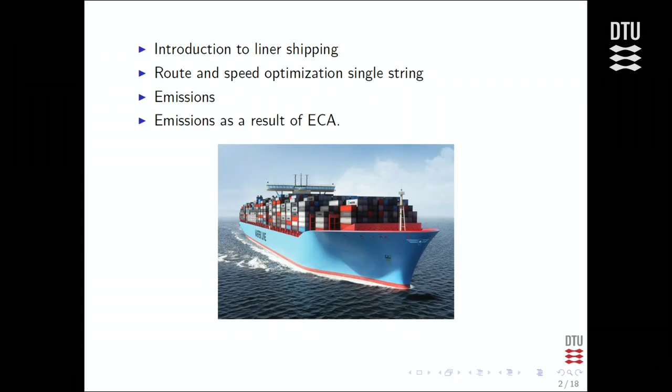So what the discussion is: does minimizing the cost of the company actually also minimize the emissions? And we're going to look a little bit at that.

In this work, we're not going to look at transshipments and all these kinds of things. We're only going to look at a single service, and then the transit time is kind of a way of dealing with the transshipment requirement that you can reach your connection on time.

Of course the companies want to reduce costs, especially now. I think before they were a little bit more like they wanted to increase number of customers, but now they want to reduce their costs because the freight rates are really low, and they want to be competitive with these freight rates.

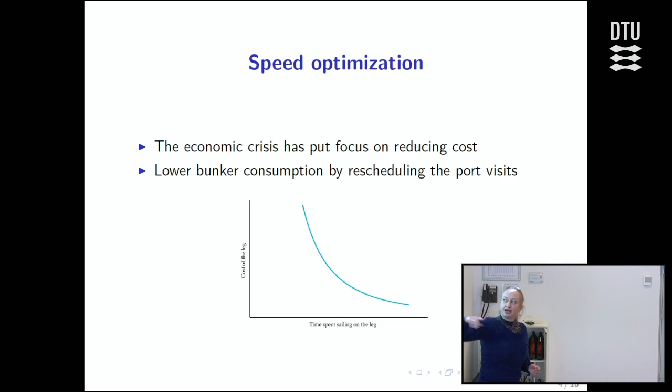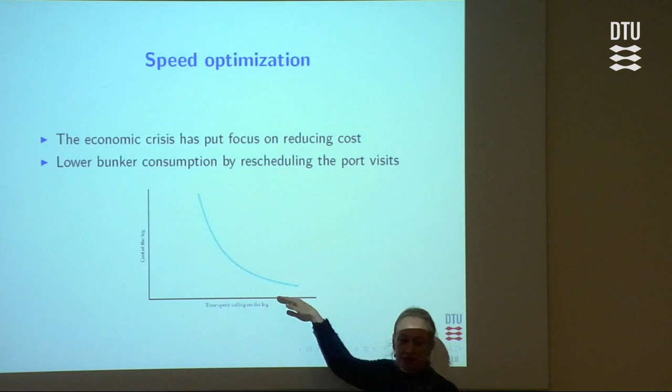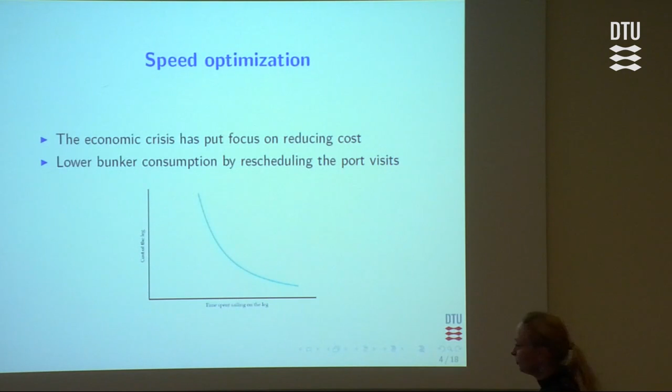And so you have this type of bunker consumption. Usually this is a cubic curve, and this is what is theoretically assumed, that the bunker consumption is a cubic curve, but it is some sort of a curve - if it's cubic or non-cubic, it all depends. But the key is that the slower you sail, the less bunker you use on the entire journey.

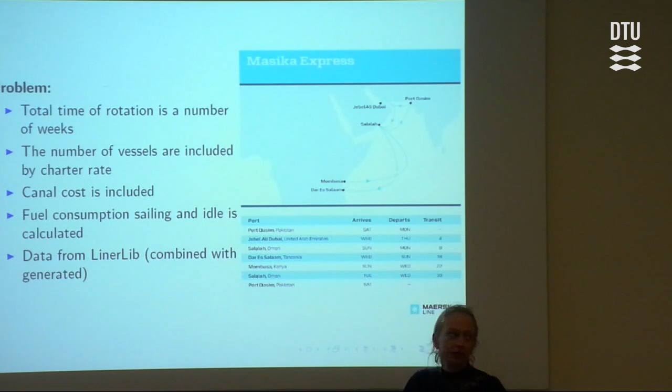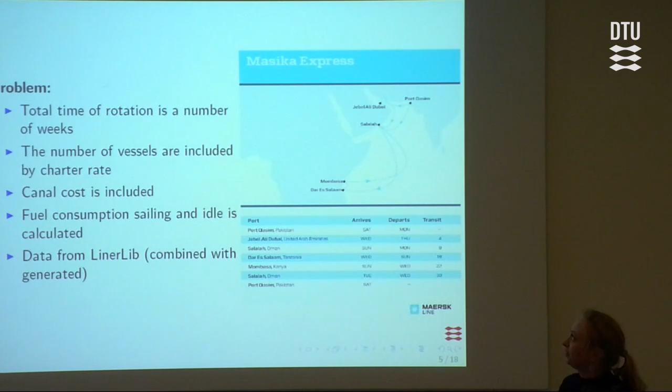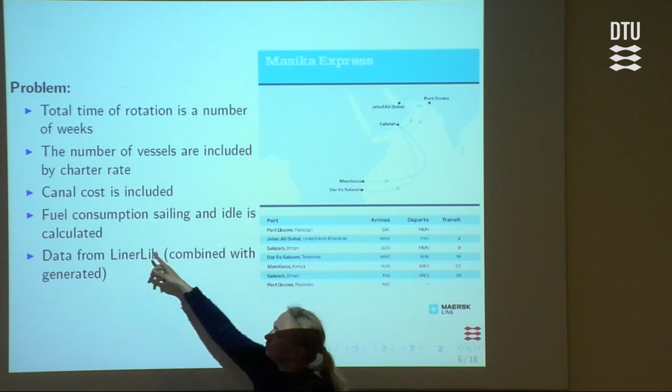So what we are considering for a problem: we have the total time of a rotation as a number of weeks, and that number of weeks has to be satisfied - for our route it has to equal some number of weeks. You can add and subtract vessels at some charter rate. Actually in the example I'm going to look at later, we don't really consider canals because it's outside of that area, but for other examples the canal costs are included.

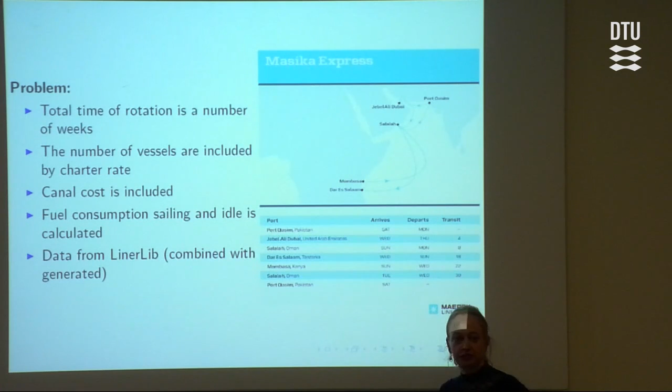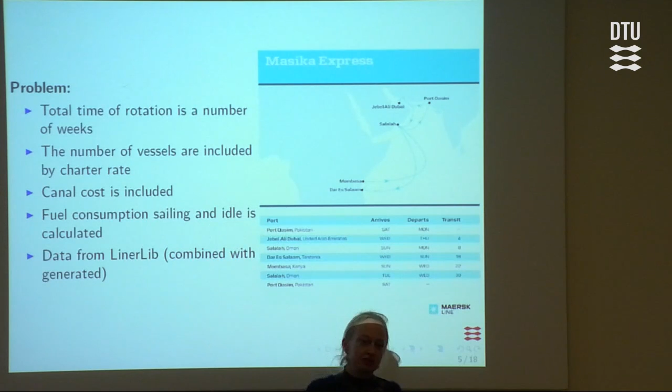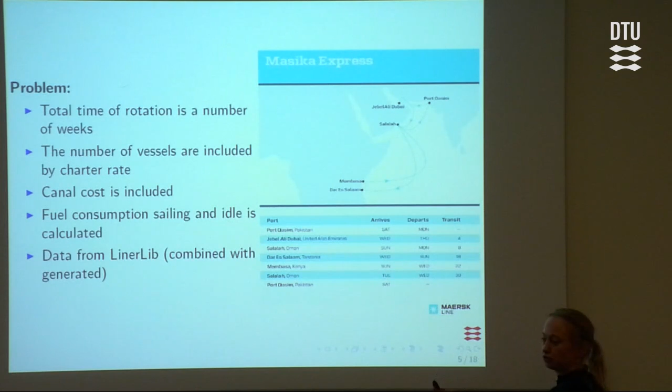The instance is part of the LinerLib, taken from the LinerLib which David described earlier. Then we have fuel consumption, and because we can't sail infinitely slow, we also have some idle consumption, because you cannot reduce the consumption infinitely - there is some limit to where you actually increase the consumption because you extend the time that you use on the journey.

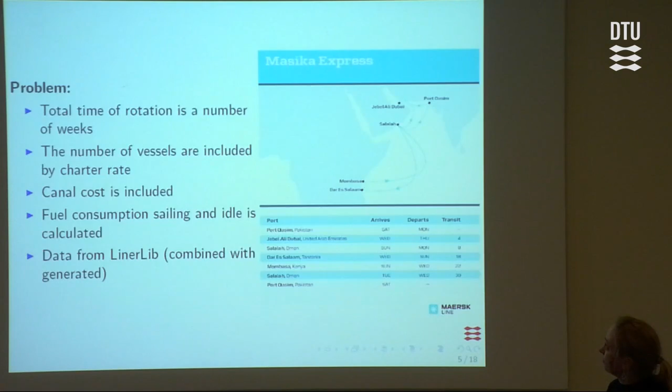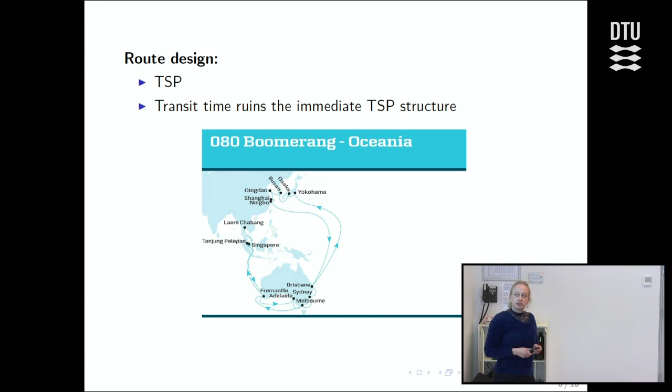This is just an example of a route where you have these port visits. So we kind of use a TSP structure, but the transit time ruins this idea of using a TSP to start with. You can't say that the shortest route is also the cheapest route, because the shortest distance doesn't necessarily introduce the cheapest amount of bunker, due to this transit time constraint.

Okay, then we go into the emissions. So we have the sulfur oxide emissions, and that causes acid rain and respiratory diseases. There are some regions - the Baltic Sea region, the North Sea which is kind of a connected region, and the North America coastline, US and Caribbean.

Then in 2020, it's actually supposed to be also for the rest of the world. There's some bunker reductions - oh no, I think the US Caribbean is supposed to be... now I don't remember, but the sulfur is supposed to be reduced in 2020 or maybe later to 0.5% sulfur.

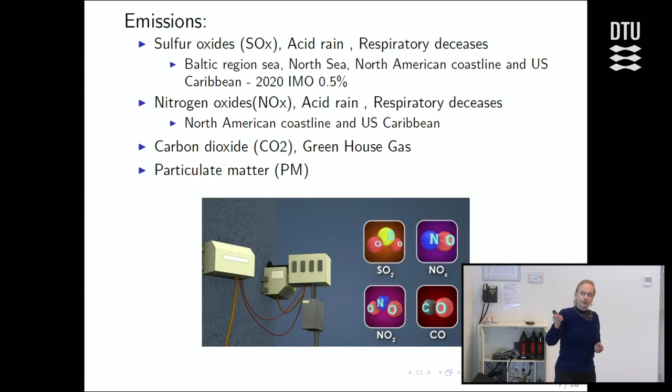And then we have the nitrogen oxide, which basically causes the same health issues, and that's in North America and the US Caribbean. And the carbon dioxide, which is a greenhouse gas and affects the climate, and then particulate matter. So today, what we are going to look at in this example is the sulfur and the carbon dioxide emissions, and we are ignoring the nitrogen oxide and the particulate matter because we are looking basically at Europe.

So the question I wanted to pose is, by these emission control areas, do we really get what we want or what we need? And how do companies change their operations according to these emission control areas?

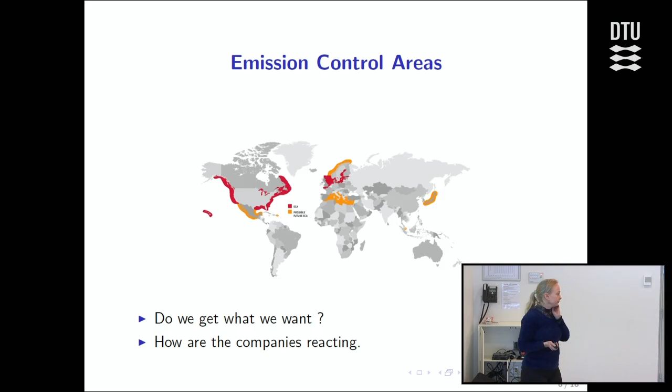We can assume that companies want to reduce their costs. They don't want to use extra money on something that is not required, but they also want to satisfy the requirement. They don't want to have the media come up and say they're getting a fine, at least not the big companies that also care about their image. They want to satisfy the requirements.

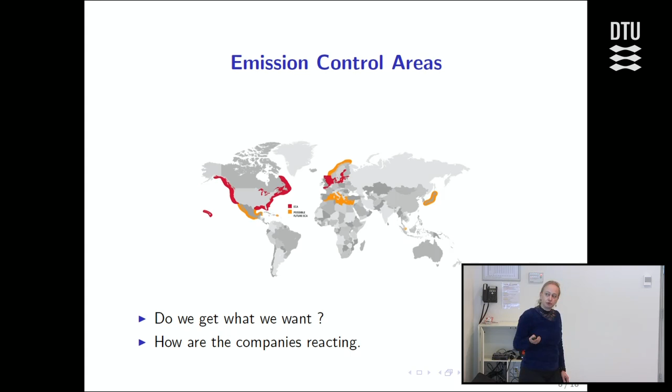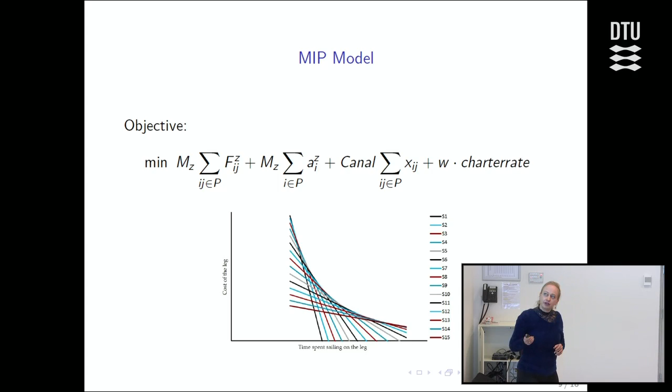So do these requirements that we have here with the ECA zones actually do as we want? We've made this model that has all these requirements, and we have the bunker consumption, where Z is the zone, so it could be a non-ECA zone, an ECA zone, or SECA zone. This is for sailing, this is for idle time, and then there's some canal cost and some charter rate. This is basically our objective from the company - they want to minimize these costs.

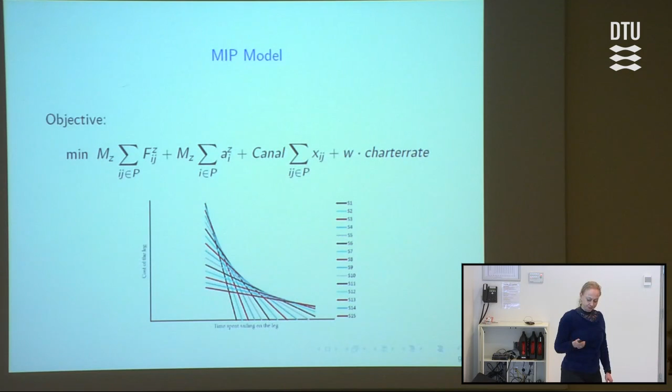And so for the bunker consumption, since it's a non-linear function, and we want to make it a linear program, we have approximated it by a large number of secants.

What we have looked at is the bunker type 380, which has 3.5% sulfur. This is the amount of CO2, and this is the amount of sulfur. And this is the price of the bunker. And this is the bunker that is required in the ECA zone at 0.1% sulfur, with its CO2 amount - slightly higher CO2 - and the sulfur amount, which is low. And this is the price of that bunker.

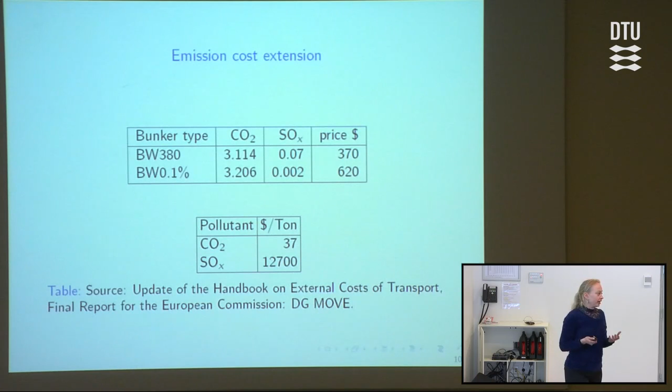We've also gotten some numbers from this handbook, because to me these numbers are a little bit hocus pocus, but luckily some other people are capable of calculating them - this is the environmental expenses, the expense on our health and our environment. It's assumed to be $37 per ton of CO2 and $12,700 per ton of sulfur. This is what they have calculated in this report.

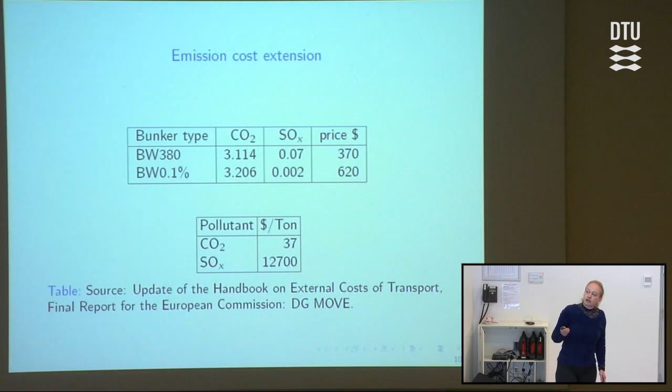So we have a second objective. Instead of just taking the cost we have here, we add an additional cost - the cost of the bunker you purchase, plus the external cost that the emission introduces. So we've split the term into two: one for the bunker and one for the emission cost. And then we again have these other costs for the company.

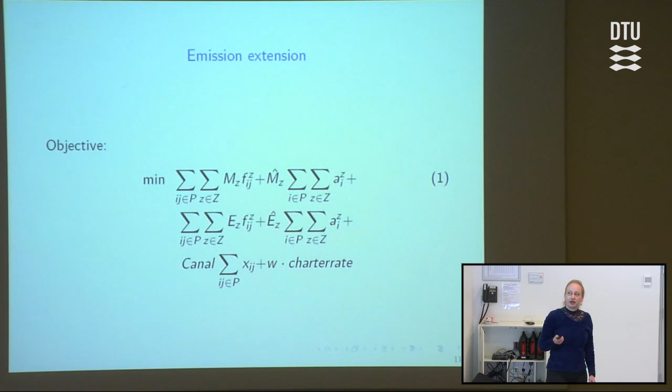So we assume - we have these different test instances, and later on we will focus on this one, the I3, which has the transit time. But we have this difference with different transit times and different fixed berth times, and we have calculated.

And so the question is - there's also people living in Casablanca and Agadir, who can just as easily get a respiratory disease as we can. So the question is, what is the overall pollution on a journey like this? I think this has been one of Maersk's routes, taken from their page.

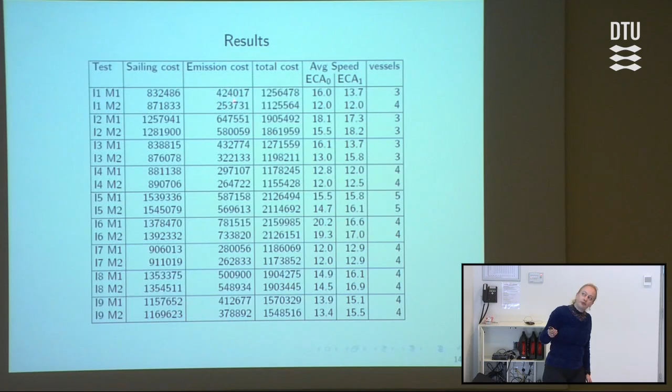So the emission cost is higher because they're just operating from the perspective of lowering their own cost. You can see the total cost to the environment, the sailing cost for the company, and then the emission cost, which is much lower here, and the total cost. There's a big difference in the emission cost between the two models, but the difference in the sailing cost is actually not as big - so there's not so much extra the companies have to pay to actually save a lot of money on these external costs.

For the environment. Yes.

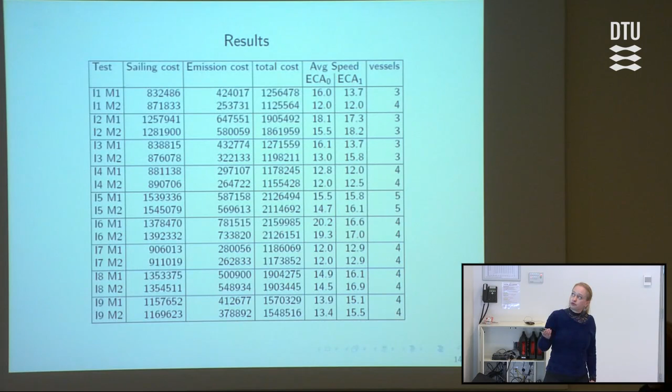And we'll take this one out, which has 2 transit times. So it has these requirements for the transit times that it has to reach. And we'll look at that one in detail on the emissions.

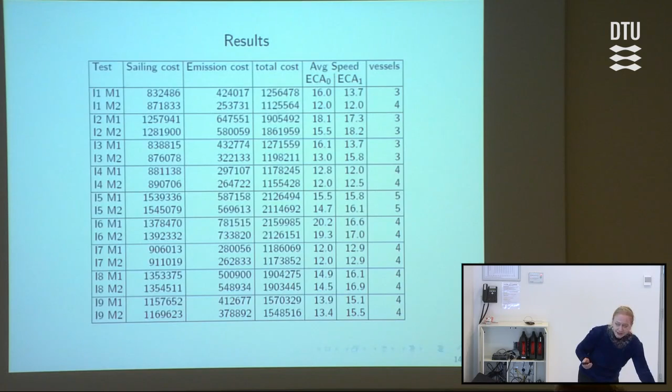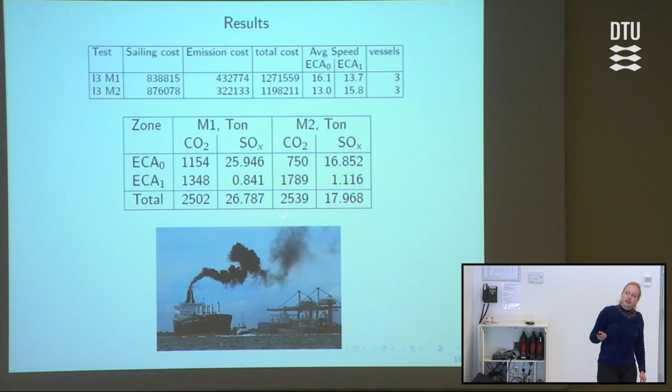Compared to this, from the company cost perspective, the CO2 is a little bit higher. But the question is, isn't it okay that it's just slightly higher when you reduce the sulfur so much? Yes.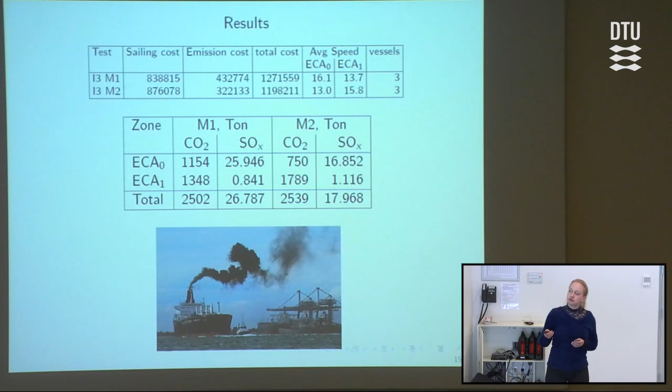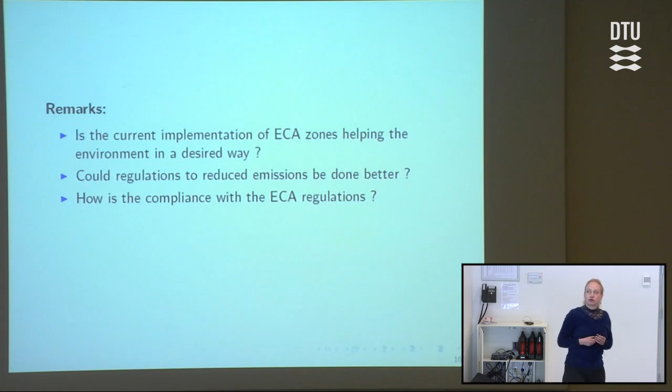So, I guess it's a little bit short, but the big question here is actually, is the current implementation of the ECA zone actually helping the environment the desired way that we desire? And could these regulations be done in a better way?

I guess now the IMO might lower the sulfur emissions all over the world. So in that way, the difference between the two zones is not as significant, if and when that is done. And also maybe there's...

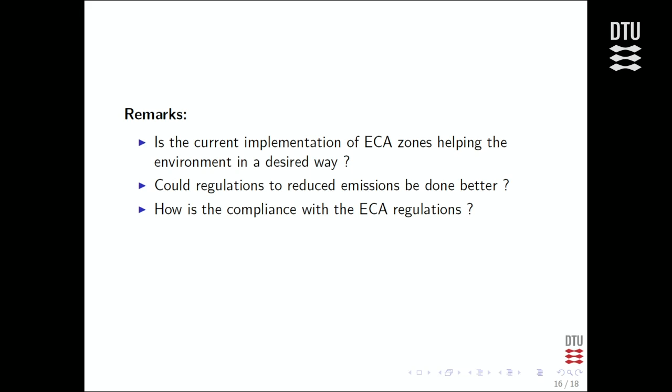Nowadays I read somewhere that somebody said it's nearly impossible to be caught cheating with the ECA requirements. So it means it's very, very hard to catch the cheaters on the ECA requirements. And maybe there's some other way that it could be done, for example, some monitoring approach.

That's part of the project as well, the Maneco project. It's not something we're looking at yet. Christos is going to look at that in the future.

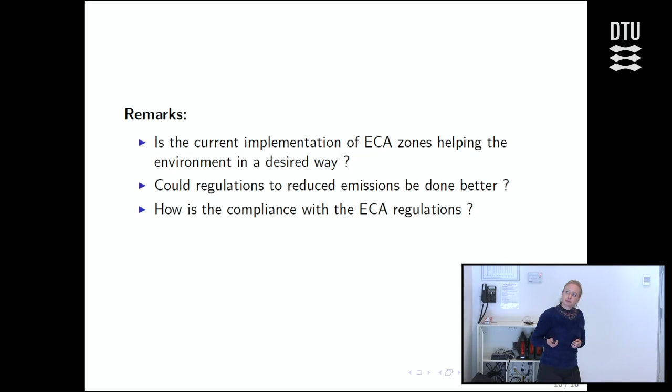Yes, so there's a little bit on the model. The model is fairly simple, or not so optimized, so some work can be done on it, so it can solve a large amount of ports, and maybe it could be verified by the industry in some way.

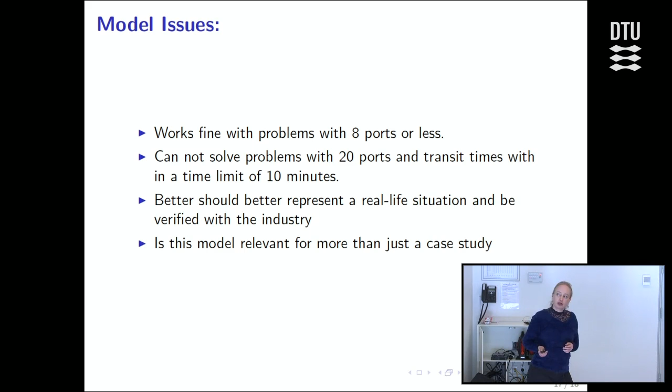And then, so maybe it would be nice to compare to the current solutions. What are the current solutions operating from in terms of speed, and how are their emissions currently, and how could it be optimized?

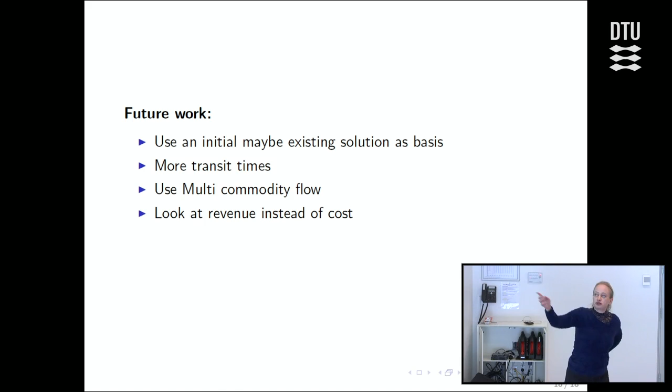And maybe this was just an initial model, so introducing more transit time, 2 transit times is not really representative enough for the network. You would probably have 8 or 10 with something with 8 ports. And then you could also maybe have some demand into the model if you wanted.

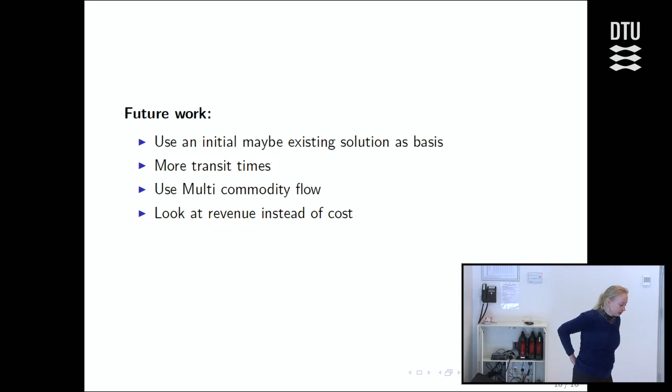That's it from me. And I think I have, oh, I forgot - I usually have a question slide, but I didn't add it. I should ask if there are any questions. So, any questions for me?

Yes. So when you optimize speed on the service, how much flexibility is there to optimize the speed? Like David was telling that you have all those time windows, and then the program becomes difficult to change.

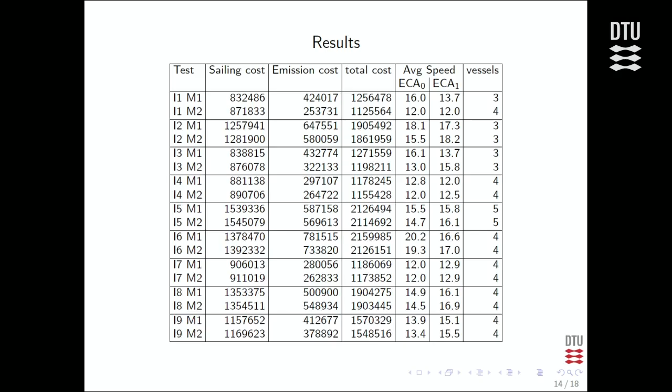Yeah, but since there's a lot of possibilities, because here, I mean, that's one of the maybe issues with the model, but I don't have very many transit time restrictions. So it also has a routing option into it, so there's a lot of flexibility. So you can rearrange the order you select the port visits in.

Line, I think you had it in one of the slides. What is the average speed in the SECA area and outside the SECA area? Oh yeah, I think I had that in this. Yeah, so let's see. So of course...

This one is a little bit different because the model added another vessel. But if we look at this one, then if you have, for the company's perspective, let's take this one. That one is more fun. That's also the one they're selling.

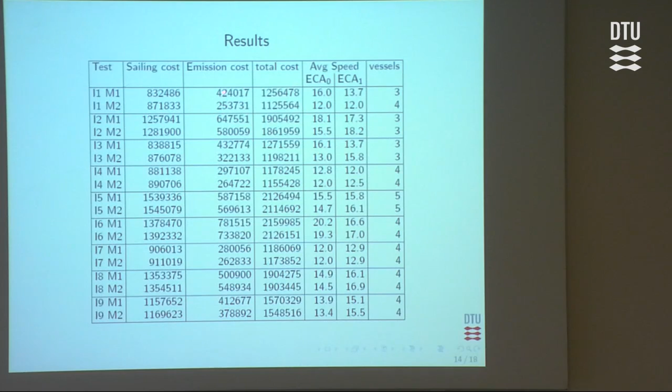Then they have 16 outside the ECA and 13 in the ECA. And actually they changed it around a little bit here. But that could be due to some transit time. I think if I go back once, so number I1 doesn't have transit times, and I4 and I7. So let's see.

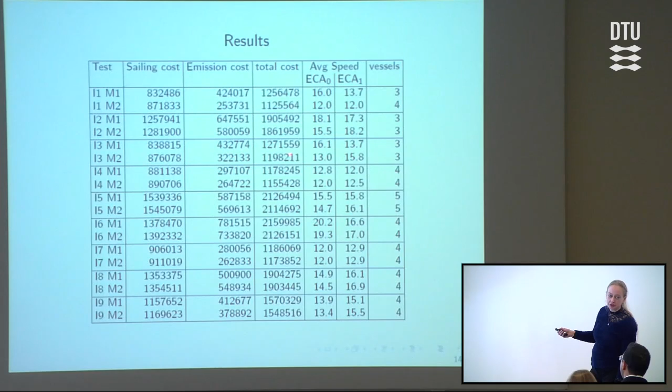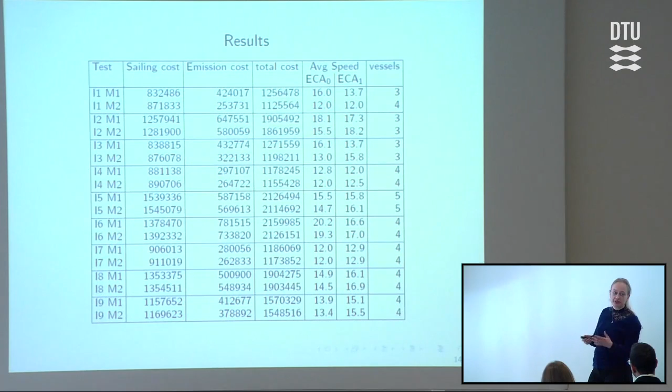So if we go and look at these ones, they actually speed up a little bit inside the ECA. If you look at the emission cost, before it goes slower in the ECA compared to outside when they optimize for their own cost, but when they optimize for environmental cost, they speed up slightly inside the ECA. Because to make up the time they can slow down outside, since the external costs are so expensive.

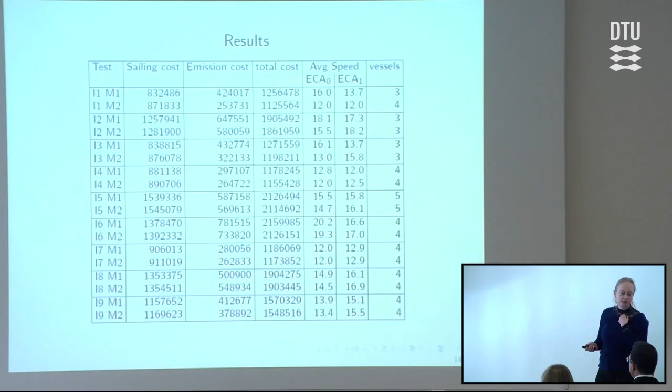You can also see it basically everywhere, you can see it here as well. They have this reverse here, there's a reverse as well. And here, where was it? The 7 - actually this one doesn't have any changes. But yeah, so they actually reverse the speed pattern.

So it is more expensive for the companies, but the sailing cost is not that different because they still probably stay within... I think the max speed of the vessel here is 24, I believe it was 24. So they're still far away from where it really consumes a lot, the peaks.

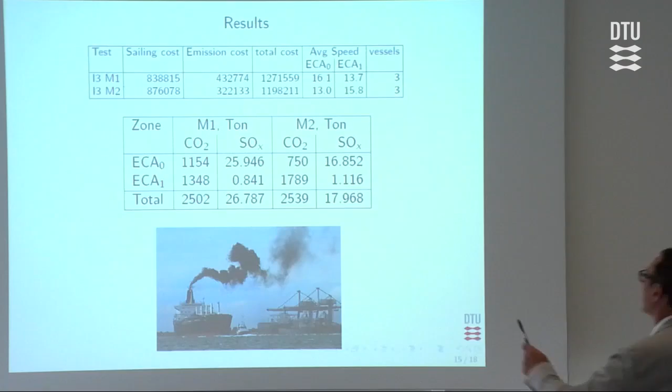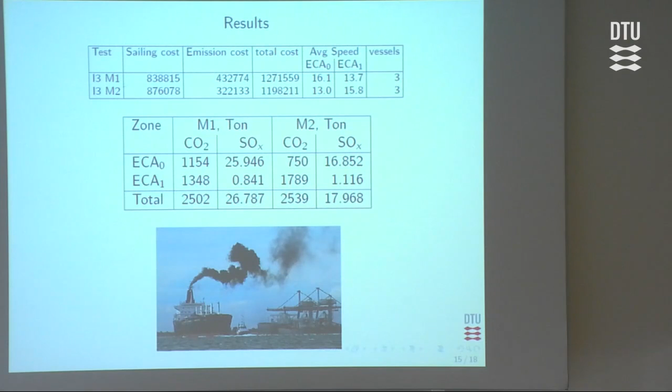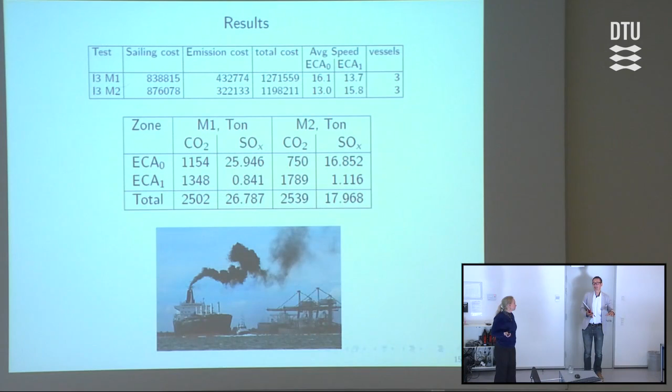More questions? I have a small question. In one of your last result slides, you said there was a paradox where you were using slightly more CO2 emission but reduced the sulfur considerably. Could the explanation be that the low sulfur bunker, when you remove the sulfur, has more oil in it - actually more energy in it? Yes, and then the fuel energy being bigger in the low sulfur means you would use fewer liters. So this could come from this fact.

So they actually have the low sulfur bunker with higher CO2 because there's more emission per ton in it. Yes, it's because when you try to extract the sulfur out of the oil, you consume energy. But that gets into your per liter figure - it is energy that you have consumed in the refinery.

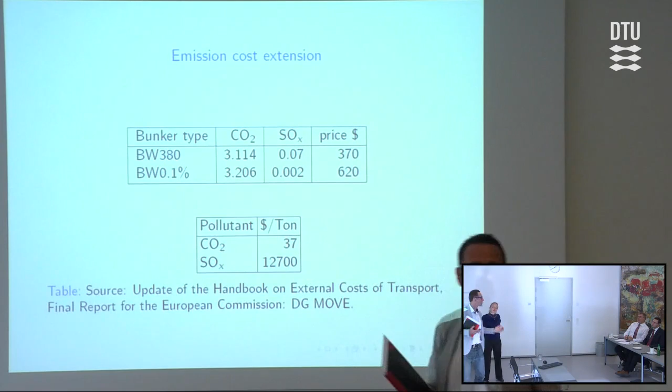Okay, so it's already in the past, I didn't know that. Because I thought that if you have removed 3.8% sulfur, then you have space for 3.8% more bunker, and this means you can also run 3.8% longer on a liter. No - this 3.8 has nothing to do with the carbon content of the fuel. So the burning value is absolutely the same.

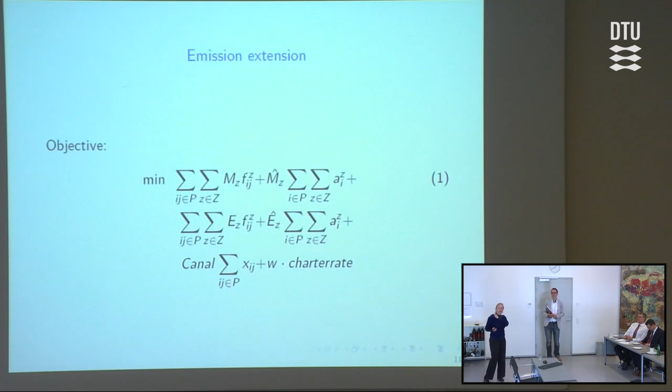I have a last question then. Do you think we will ever get these global ECA areas if it's so difficult to catch people who are cheating? I think it might be introduced, but I am worried about whether or not people will comply with it - about the compliance with the ECA zone.

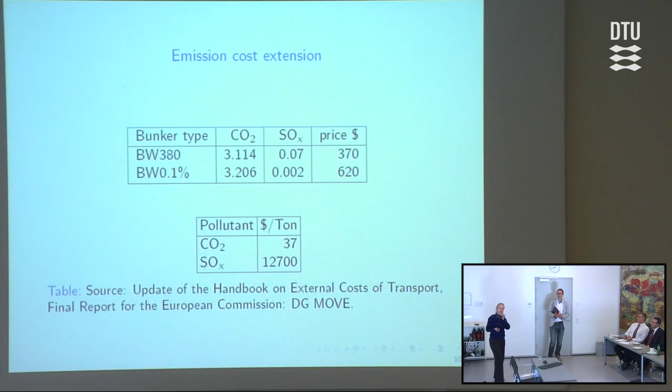Yeah, this will be a paradox because those who are cheating can offer lower freight rates and get even more containers, but those who actually try to satisfy the rules will go bankrupt. I think this is one reason why Maersk is very active in this area, because they want to make sure compliance is the same, otherwise if they satisfy the rules they will lose in the competition, or may lose.

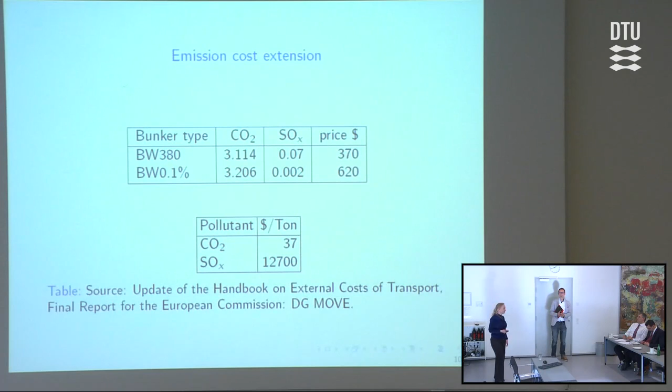Will they continue selling this bad fuel if you have larger ECAs? Maybe then you have to stay longer to actually get that. But let's say it was Russian ships starting in Russia and nobody knows what's in the tank - then you have to go and check what's in the barrel, and you have to trust some countries, and I think maybe some governments don't keep regulations as strictly.

I think George was first and then Marinos. If I'm not mistaken, a recent report I saw for the Baltic Sea shows compliance is quite high - above 90%, around 95% compliance. So it's not that hard to comply, at least in this part of the world and also in the States.

Compliance is okay, of course Russia, as you said, is a bit of a problem. But there's still sometimes you can get a fake certificate, so even if you check compliance, you might not know if the compliance is real.